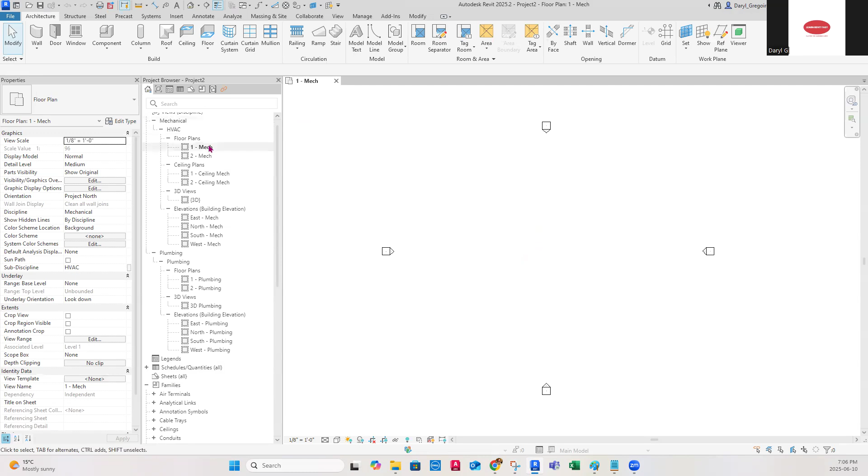So I'm in a level 1 mechanical floor plan, and I'm going to go up to the system tab, and I'm just going to click on my pipe tool and start it off. And you set the system, the pipe type, and all your little dials. So I'm going to say I want it to go on hydronic supply. That should give it color if supply has a color tied to it.

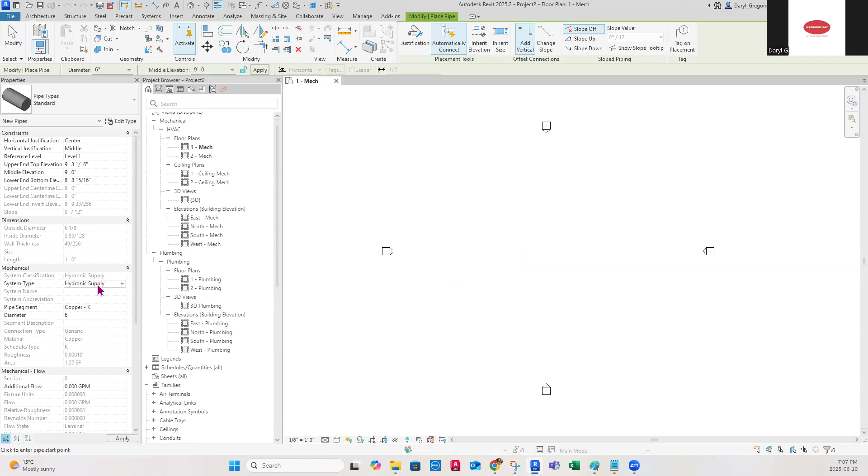And then I'm going to work my way up here and pick my pipe type. Well, I don't have a lot to pick from. I'm just going to use the standard pipe for this, a 6-inch diameter and at 9 feet up in the air. So I'm going to start to draw, and there I am, drawing my pipe. Now I'm in single line mode here, so it's not going to show me double lines.

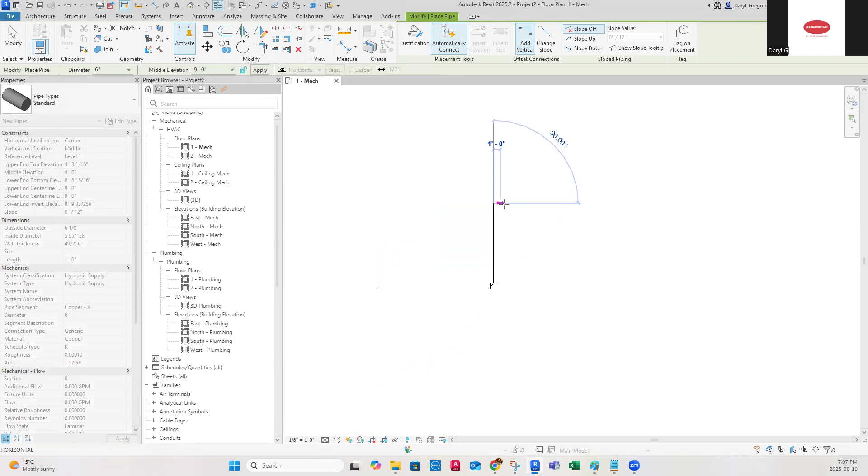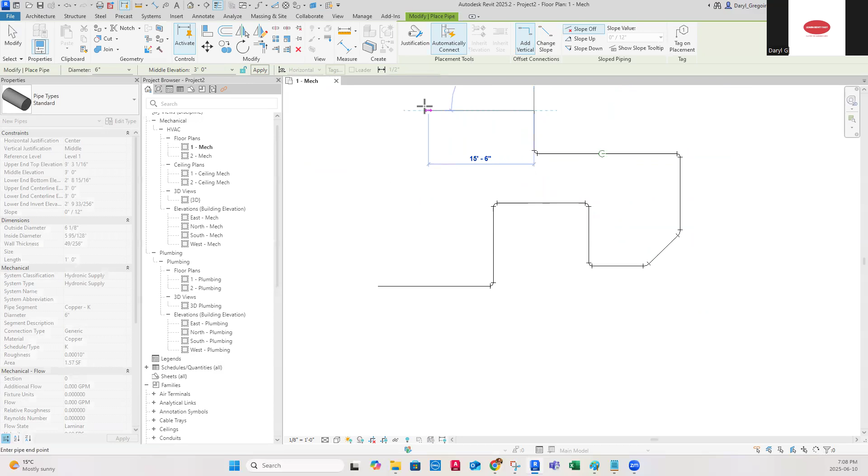That's okay. So as I move along, I can use my shift key, and that's putting it in single line, nice and straight. And I can take my hand off the shift and do a 45, etc., and then back on the shift, and then click, and then I can drop it down to, say, 3 feet. So I'll go in here and just type in a 3, minimal typing, and continue in a straight line, and it'll put that riser in there for me. Now I'm down at 3 feet, and I can carry on.

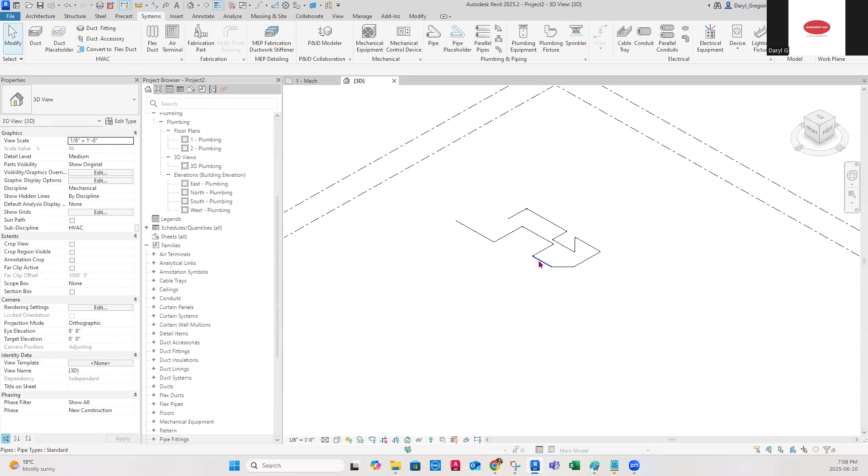Okay, and I can hit right click cancel or escape, either way. And now I'm going to switch my detail level at the bottom here to be fine. Now I can see my 3D pipes. Now up here on the quick access toolbar, I'm going to hit what I call the doghouse 3D button. And if I zoom in, it also needs to be set to fine detail. And there I have my pipe.

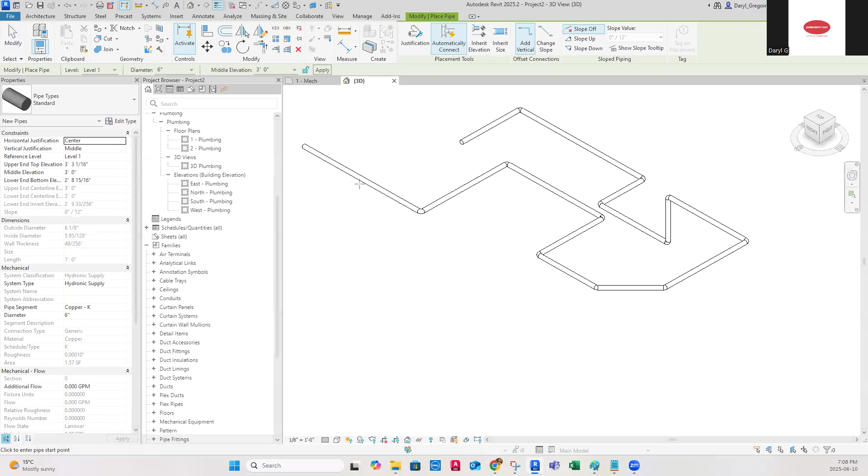So if I want to pull a pipe off the low one, I'll use my space bar to adapt the size and height. So watch. I'm going to start my pipe tool again over here. And what I want to do is start up high over here. So pick the middle line of the pipe if you can find it. Doesn't matter so much with pipe, but I pick the pipe and notice it's set to be 3 feet where I left off. Watch. Space bar.

I don't know if you heard that, but if you hit your space bar, and I will want to use my shift key because I don't want to come off at some weird angle, I can pull a branch line off of there and it'll put in a T. I can right click and hit cancel.

Now I want to come off at this low point again, pan over, pick on this pipe, and look, I'm up high. Now, if I want to stay high, sure, I can use my shift key and it'll put that riser in there because I'm up at 9 feet. Okay, right click and hit cancel. But I want to come off low. So when I pick on here, watch, space bar. So now I'm down low.

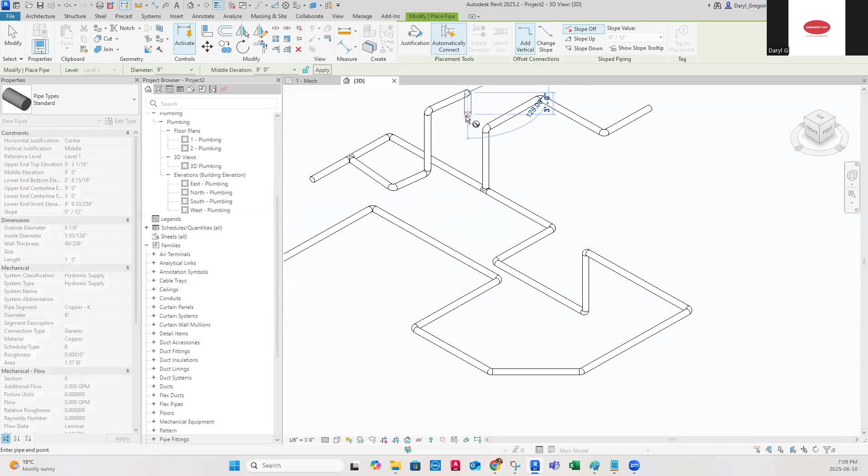Oh, I just did some really weird angle. Revit's going to actually let me do that, and then it's going to try to make me do a 45 based on that. That's a weird angle. I'll have to go back and fix that. Now I can go back up to my 9 feet, and then hang a right and go over top of that pipe and then carry on wherever I want to go from there. And then right click and hit cancel.

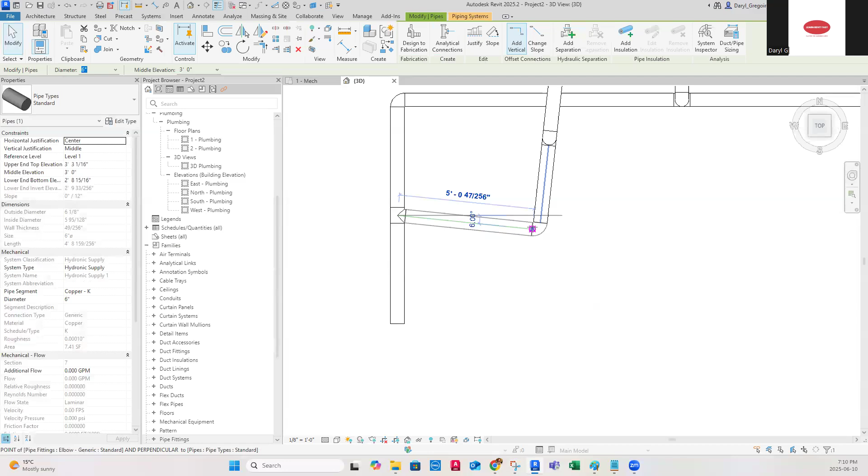So outside of that weird angle, I could probably fix that by going to my top view and zooming in over here. Hit right click cancel, pick on that pipe, and what I'm going to do is grab that weird angle and drag it over to there. See what I did? That's okay. Hit cancel on that. I'm going to try it again. I'm going to drag that by the grip over to there. See how I did that?

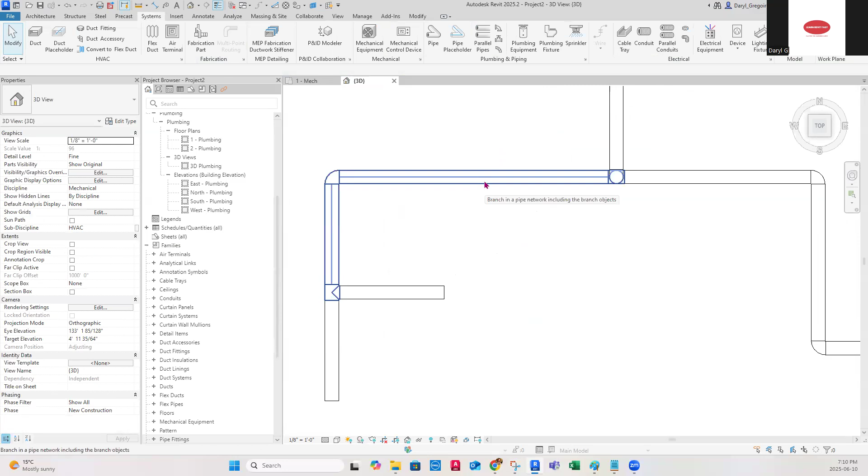Okay, now I can grab this, hover, tab to grab that, and just hit delete, and then start my pipe tool again off of there. So if you hover and hit tab, tab, tab, that's selecting methods. Hover, tab, tab. We'll come back to that.

So a little teaser on some piping stuff inside of there. Lots more to come. Switch over here to be kind of a realistic view, showing my fittings, different colors, shaded view over here. So a little pipe teaser for you.